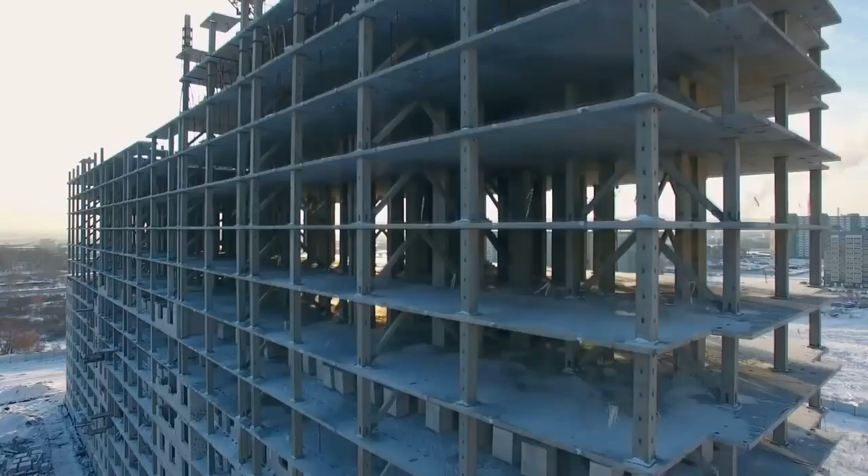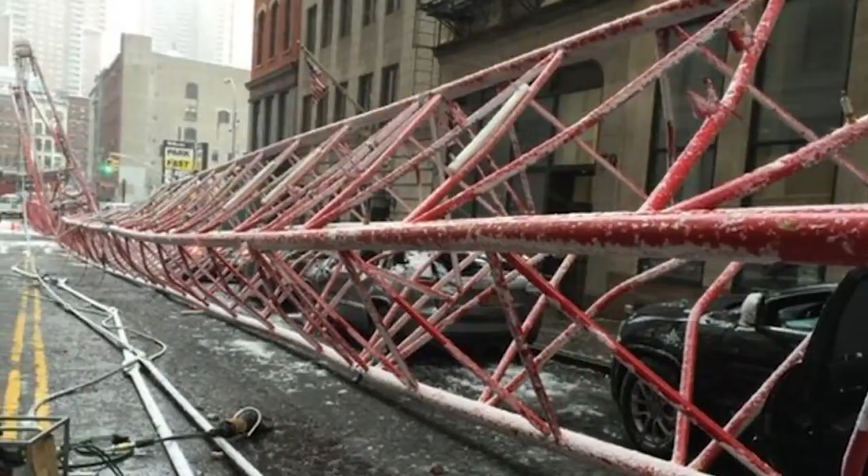While we may marvel at new building projects in our cities, what's not so marvelous is when they end up falling down. Bad planning, low-quality materials, and shoddy workmanship have led to everything from bridges to skyscrapers tumbling down. Today, we're taking a look at 15 epic construction fails.

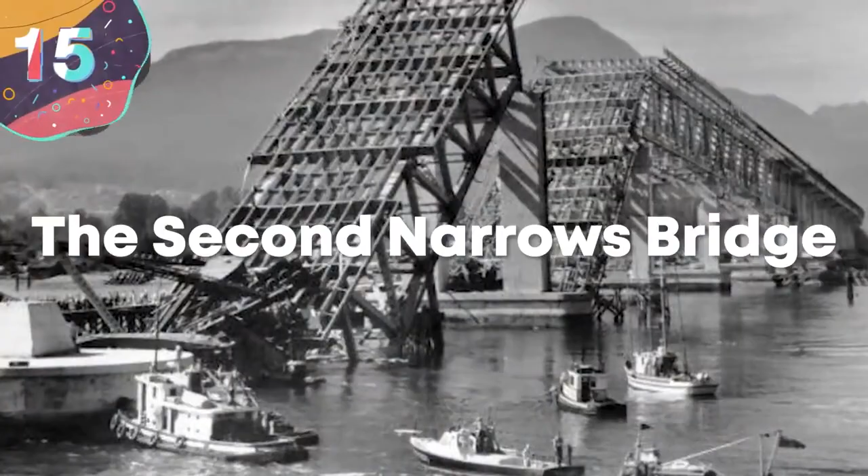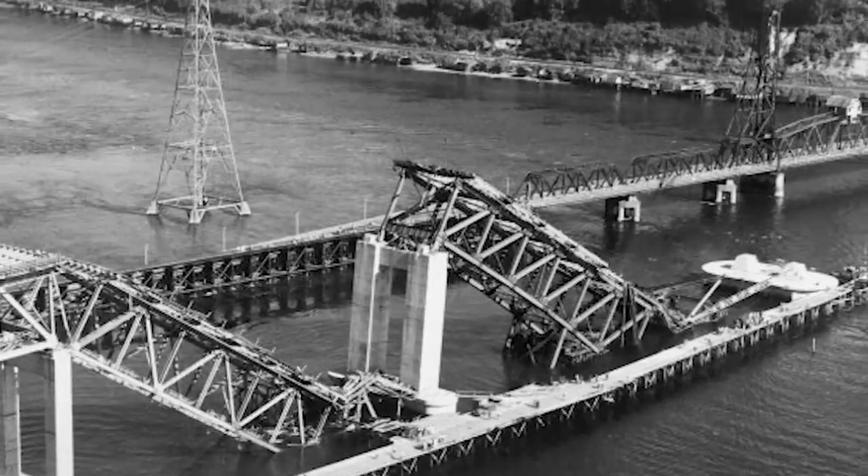Number 15: The Second Narrows Bridge. It is rare for there to be just one factor that leads to the failure of a construction project, and this was certainly the case with the Second Narrows Bridge. On June 17th of 1958, a number of structural issues worked against the bridge at once, causing it to crash into the Burrard Inlet below. The accident began with a crane being used to join two sections of the bridge malfunctioning, causing numerous parts of the bridge to collapse.

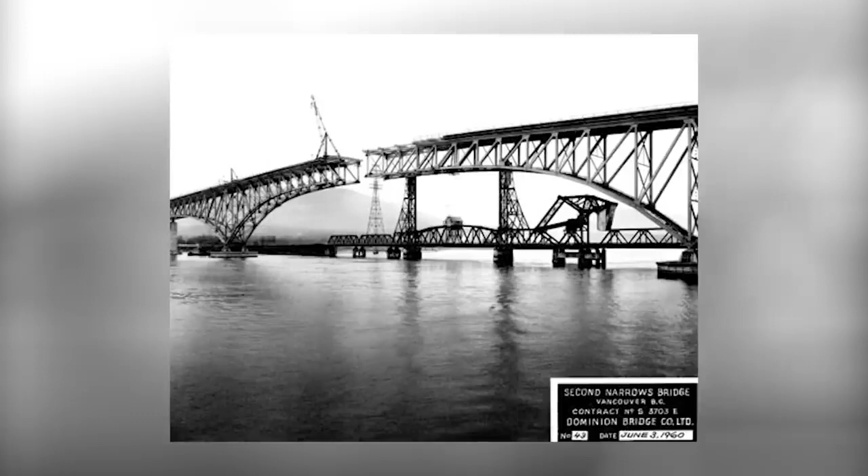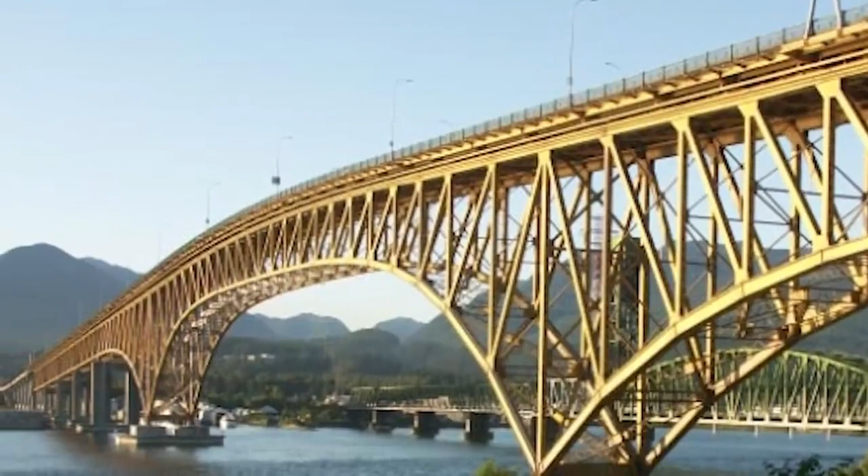After an inspection was done, it turned out that the cause of the bridge's collapse was multifaceted, due not only to the poor quality of materials used and shoddy engineering practices of those involved, but also because the temporary arm holding the fifth anchor span was too light to bear its weight. As a result, 18 workers lost their lives, and the bridge was later renamed the Iron Workers Memorial Second Narrows Crossing in 1994 to honor their memory.

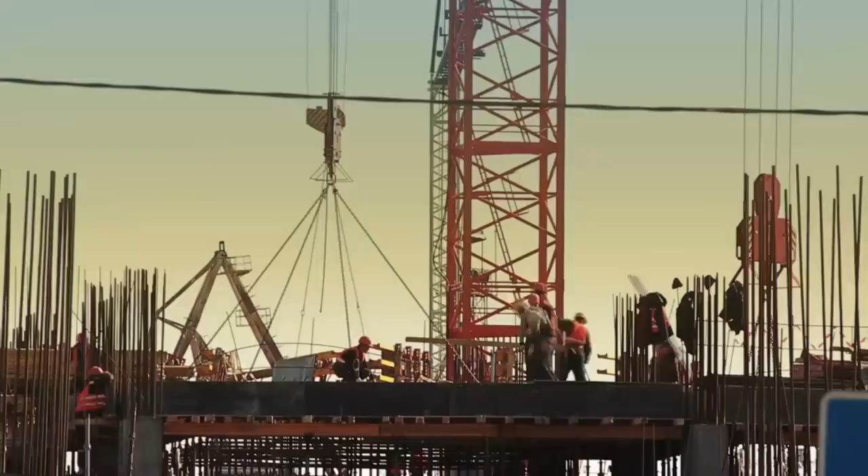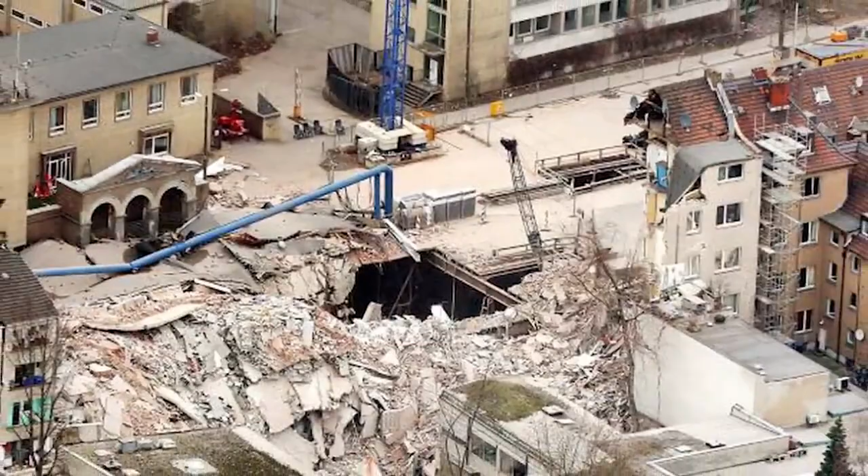Number 14: The Cologne City Archive Collapse. When building structures in a city, construction workers have to be especially careful, as oftentimes their actions can have negative consequences on the buildings standing around them. And while they're usually pretty careful, in 2009, the building of a metro line beneath the city of Cologne, Germany, caused the entirety of the Cologne City Archives building to collapse, leading to 2 deaths and damages of more than €1 billion.

Upon further inspection, it turned out that one of the underground diaphragm walls of the subway station had caused so much water, sand, and gravel to flow beneath the archive building that it eventually caused its foundations to crumble and wash away. As such, thousands of precious documents were lost, making it one of the worst cases of construction-related negligence in the city's history.

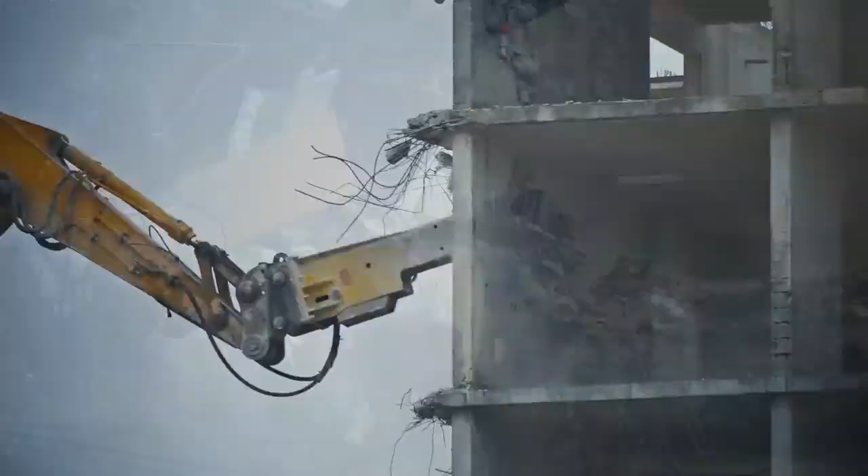Number 13: The Boston Scaffold Failure. While most construction mistakes become apparent during or after an accident, what many are not aware of is that major errors can occur while a construction site is being taken down. Such was the case at Boston's Emerson College in April of 2006.

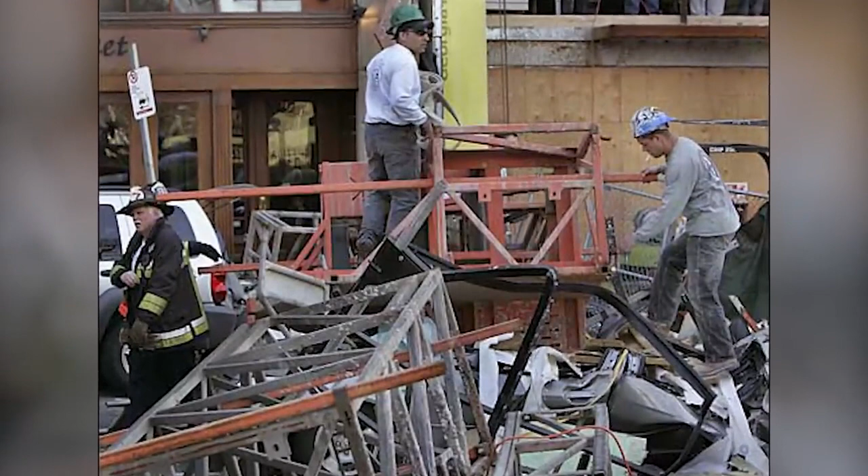While workers were taking down the scaffolding they had placed on a dormitory, they chose to disconnect the final metal tie securing a 3-ton platform to the side of the building without first attaching the scaffold to a crane. This resulted in the scaffold platform precariously dangling on a mast located 30 meters in the air, and because it had a weatherproofing tarp on it, the wind caught it and made it crash into the street below. This ultimately led to 3 people being crushed by the platform, making it one of the worst construction takedown attempts to date.

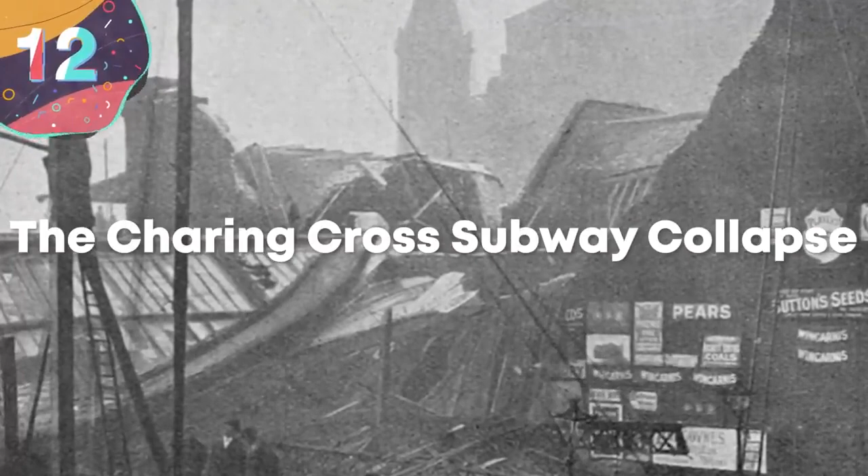Number 12: The Charing Cross Subway Collapse. Typically speaking, building maintenance is meant to make a structure in tip-top shape, yet at times it can do the exact opposite, and such was the case in the Charing Cross Subway collapse.

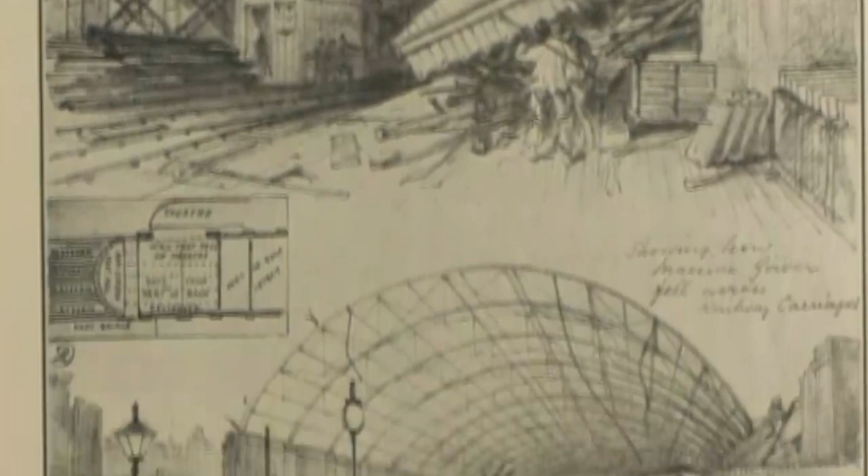Occurring on December 5th of 1905, the incident happened thanks to a 20-meter-long steel beam collapsing onto the platform below, ultimately causing most of the iron and glass roof to collapse. This led to many of the wooden boxcars of the subway train being smashed, with a total of 6 people passing away and 27 becoming injured in the disaster.

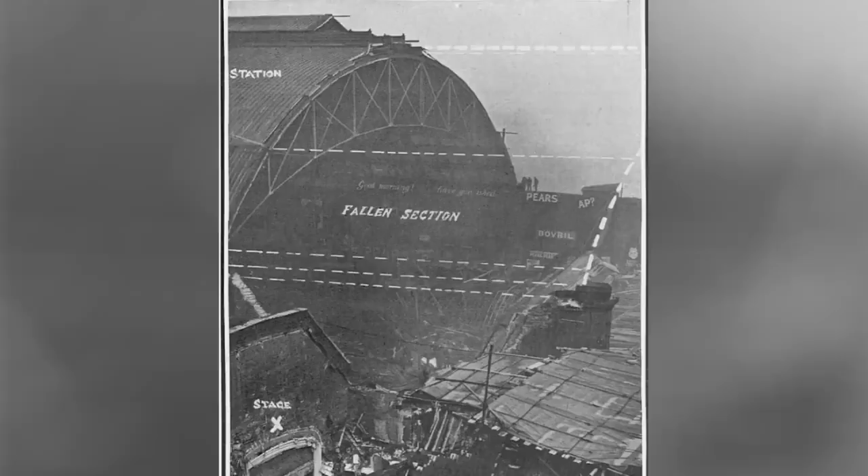Upon inspection, it turned out that the weight of the construction materials had caused the scaffolding to collapse, leading to a chain reaction that caused the entire station roof to fall. Had the workers been a little more careful, the disaster likely could have been avoided altogether.

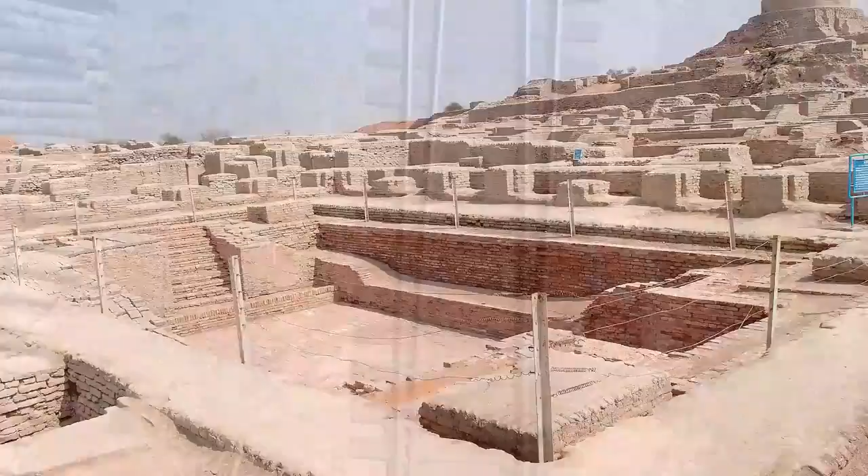Number 11: The Lahore-Multan Railway. Generally speaking, construction projects tend to build things up, but in the case of the Lahore-Multan Railway, it effectively tore things down. That's because Harappa, the archaeological site in Punjab, Pakistan, was severely damaged in order to provide material for the railway. Harappa is the site of an ancient city that existed between 2600 and 1900 BC, and is extremely valuable to archaeologists.

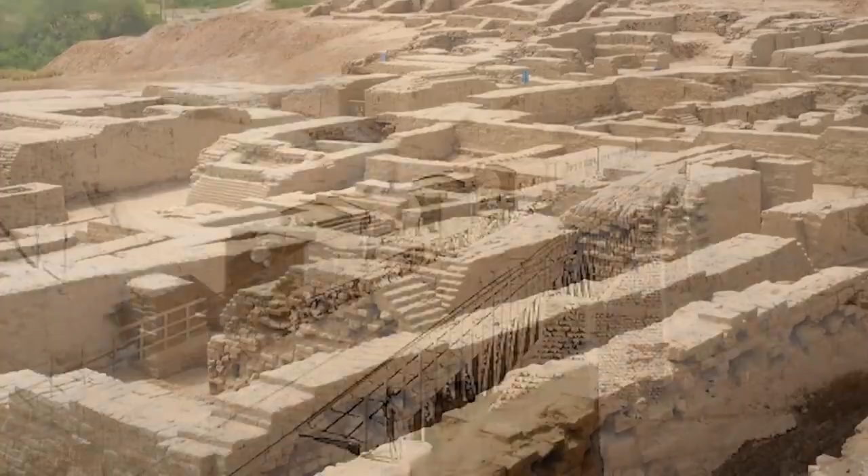However, when the British came and built the Lahore-Multan Railway, they got to work dismantling it, using many of the bricks from the ruins to make the track ballast. As a result, while Harappa is still an interesting place to visit today, the ancient city is much less intact than it was just a few hundred years ago.

Number 10: Lotus Riverside. When building an apartment, location is everything. After all, not only is it important to place it where the housing demand is high, but it's also crucial to ensure that the ground level below it is sturdy.

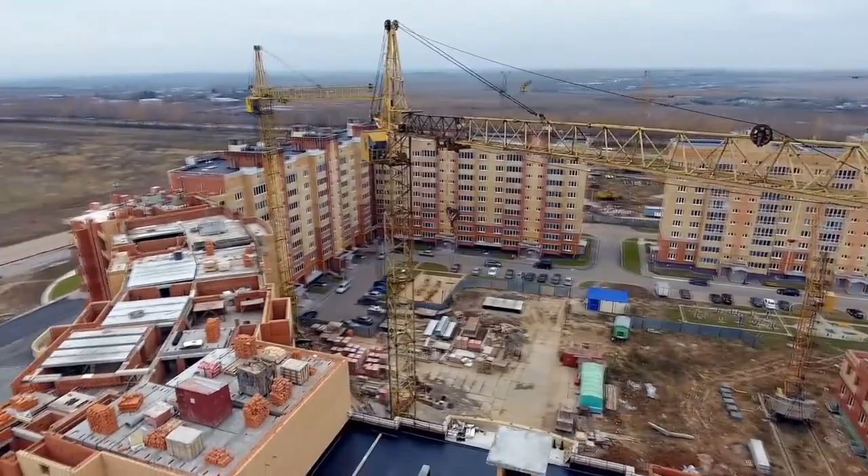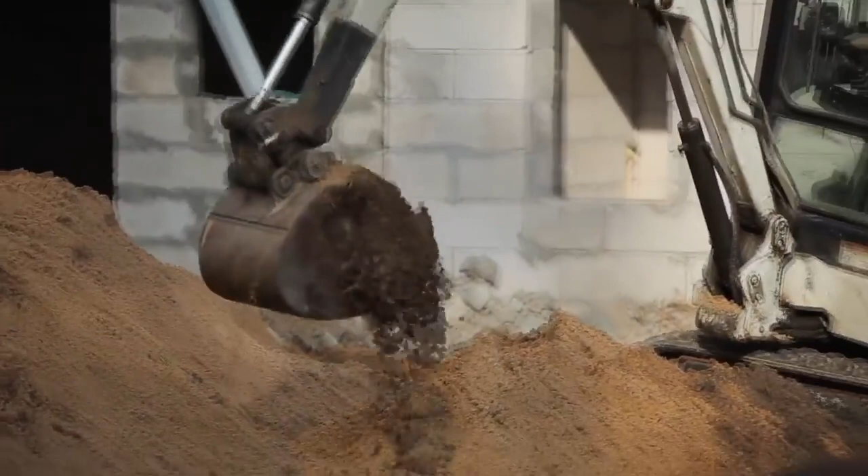However, the planners of Block 7 in the Lotus Riverside apartment complex in Shanghai, China, obviously never got this memo. While construction faced no major problems at first, issues began to arise when the builders decided to dig out a 4.5-meter deep underground parking garage for the complex.

This created a large pile of dirt. Yet rather than move it to a secure location, it was brought to a landfill beside a nearby creek. The weight of this dirt then caused the riverbank of the creek to collapse, and as a result, water began to seep into the ground beneath Block 7.

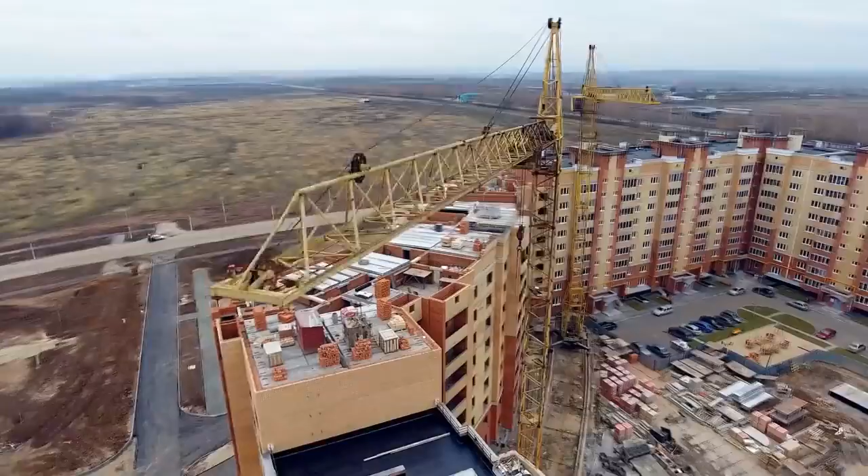This made the dirt surrounding the apartment very wet, and this should have caused the company to pause construction. Yet they continued on, and as a result, the muddy ground was not stable enough to hold the apartment block's weight in place. On June 27th of 2009, the entire building came tumbling down, trapping and killing one unfortunate worker who was left inside.

Number 9. The New York crane disaster.

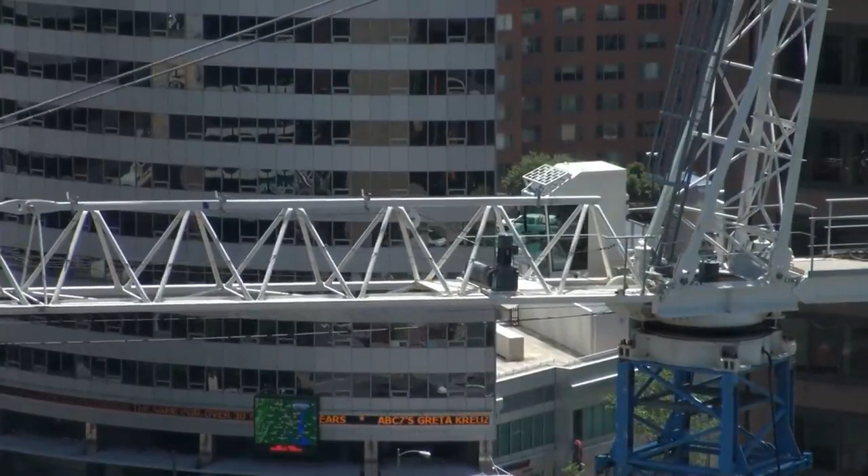While cranes may be pretty scary to operate, what's even more scary is when they malfunction and crash into the street below. Yet that's exactly what happened when, on March 15th of 2008, a crane measuring about 76 meters high collapsed. At the time of the accident, the construction workers were busy tying lateral beams to both the crane and the 18th floor in order to give it more structural support.

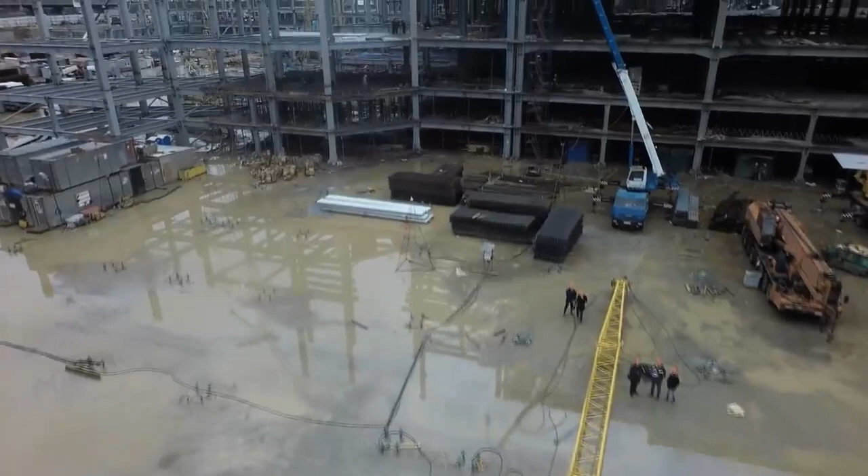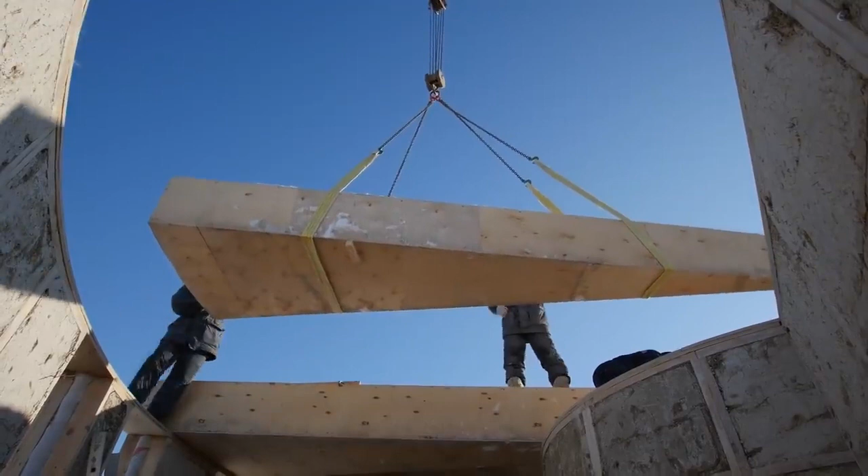This time around, they did so without the use of a mobile crane, which was something they had never done before. This was compounded by the fact that the slings they used were not only made of polyester, a very weak material for this purpose, but also not protected against sharp edges.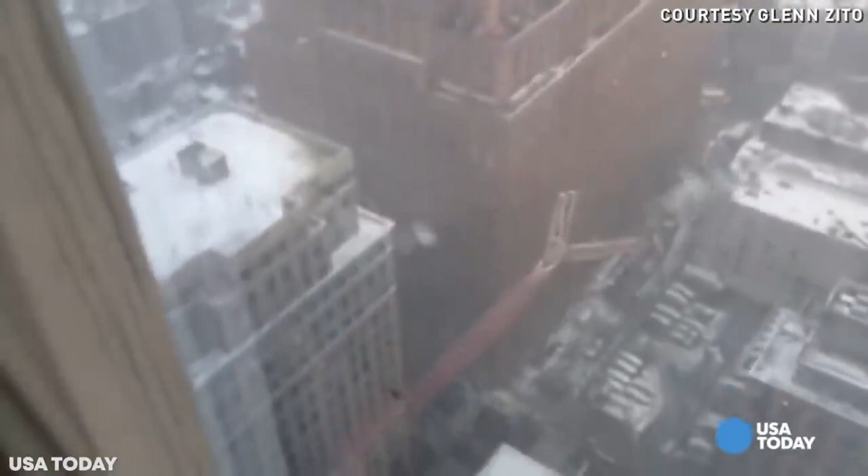It was these factors that caused the crane to ultimately collapse and led to the passing of a total of 7 people. Yet what's perhaps most surprising is that William Rapetti, the crane rigger in charge of stabilizing the crane, was never convicted of any charges.

He was charged with 14 counts of manslaughter, and due to him admitting he had not inspected the slings used in attaching the crane, many thought he would surely be found guilty due to his negligence. However, this did not end up being the case, as he was eventually cleared of all charges.

Number 8. The Greater Noida building collapse.

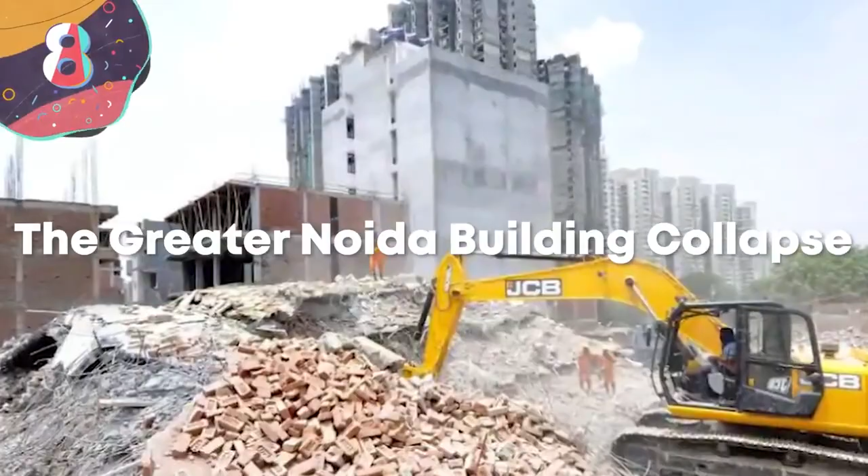While cutting corners can often cause problems in the construction of a new building, few contractors have been quite as cheap as those who built the Greater Noida apartment building in India. Despite being set to be a large apartment building, the decision was made to use woefully insufficient materials in order to create the structure.

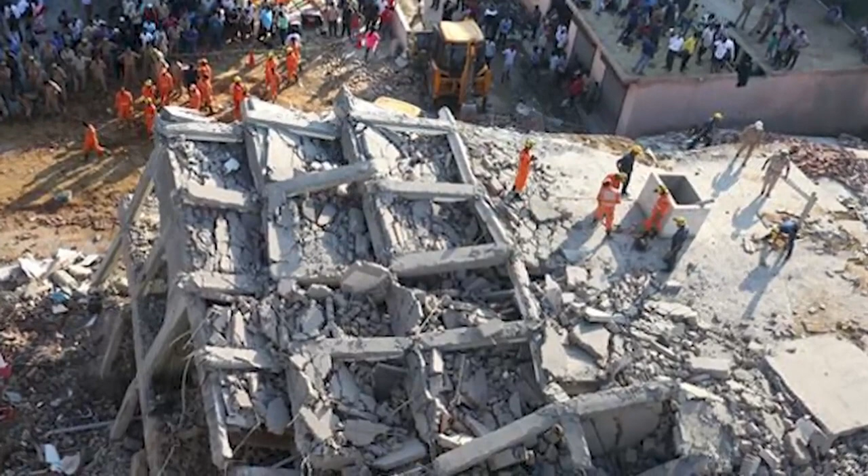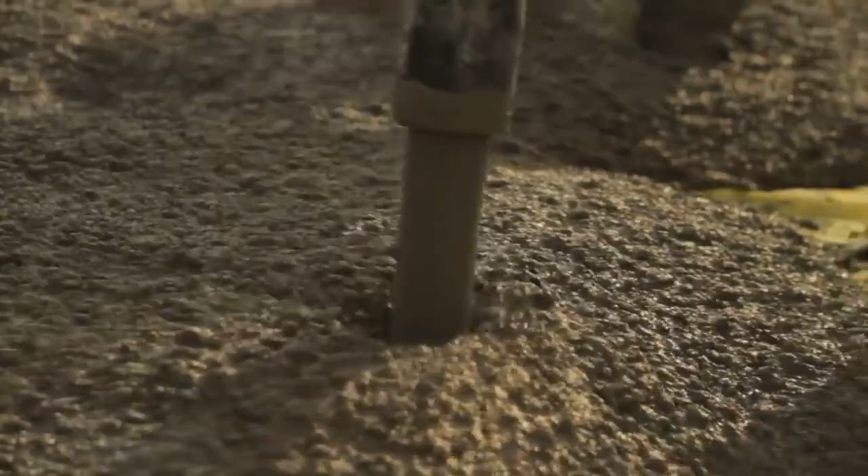It was found that the ratio of cement to sand while preparing construction material was not 1:5 as is normal for a building of this size, but as much as 1:20. The iron beams used to support the structure were not the recommended thickness of 22 to 25 millimeters, but instead just 10 to 12 millimeters.

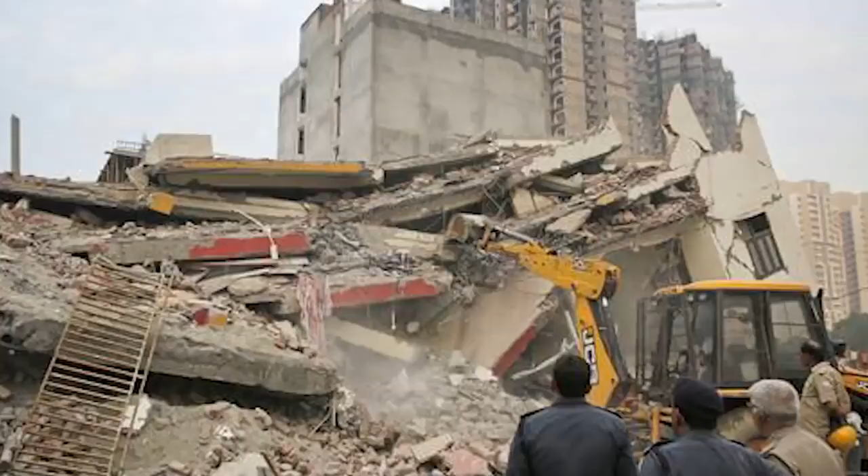When compounded with the fact that water had accumulated in the basement of the building and had made the base much weaker, it shouldn't come as a surprise that it was only a matter of time before it came crashing down. With a total of at least 9 people dying in the collapse, it was easily one of the worst construction disasters that the region has ever experienced.

Number 7. The Malpasset Dam.

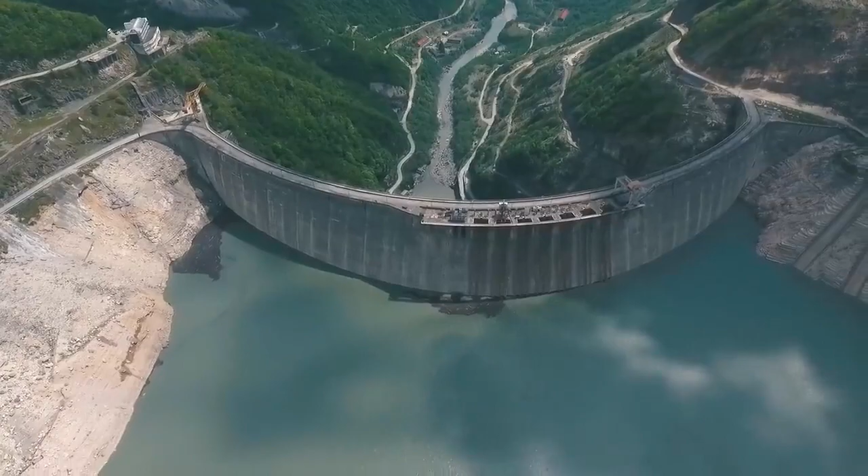When it comes to creating a dam, location is critical, as the massive amounts of water and concrete involved can cause major issues if placed in an unideal spot. While geological surveys usually ensure that these types of mistakes are minimal, the designers of the Malpasset Dam learned this the hard way, when on December 2nd of 1959, the entire structure collapsed, leading to a massive flood that took the lives of 423 people.

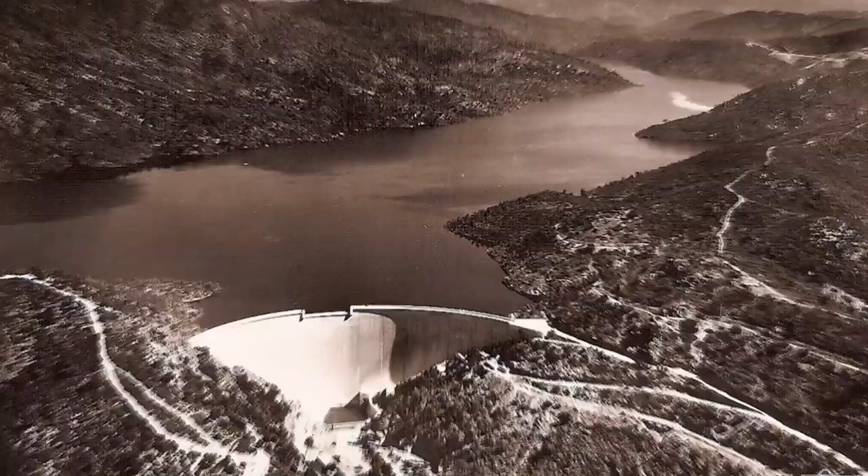The dam, located on the Reyran River in the French Riviera, was built back in 1954, and at that time the area was deemed suitable for its construction. However, what the builders failed to realize was that the area was located near a tectonic fault, and thus when they began to use explosives to aid in the construction, they severely damaged the already unstable rock.

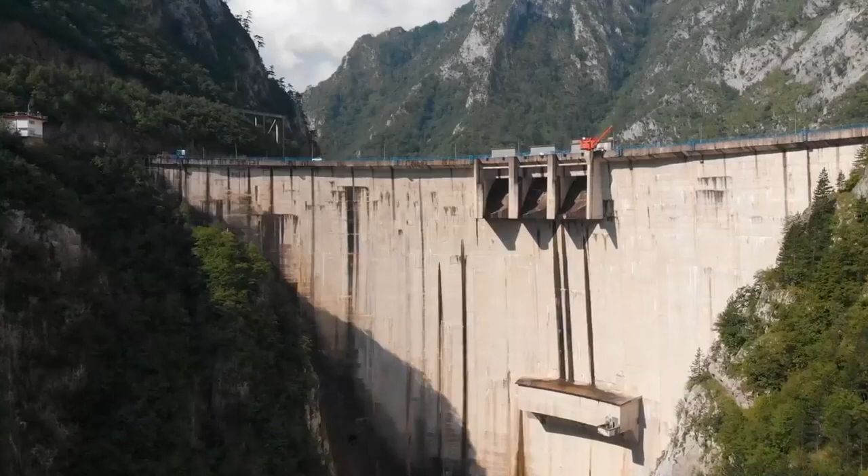To make matters worse, they built on top of a nearly impermeable rock known as gneiss, and this was problematic because it caused the diagonally flowing water to become trapped underneath the dam, further adding to its instability. Cracks began to form years before the collapse, but due to the government neglecting to do anything about it, the dam remained standing until its disastrous end.

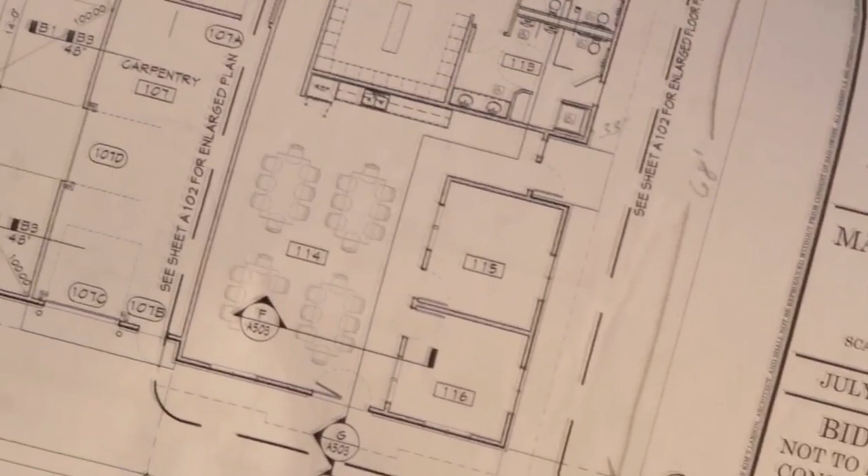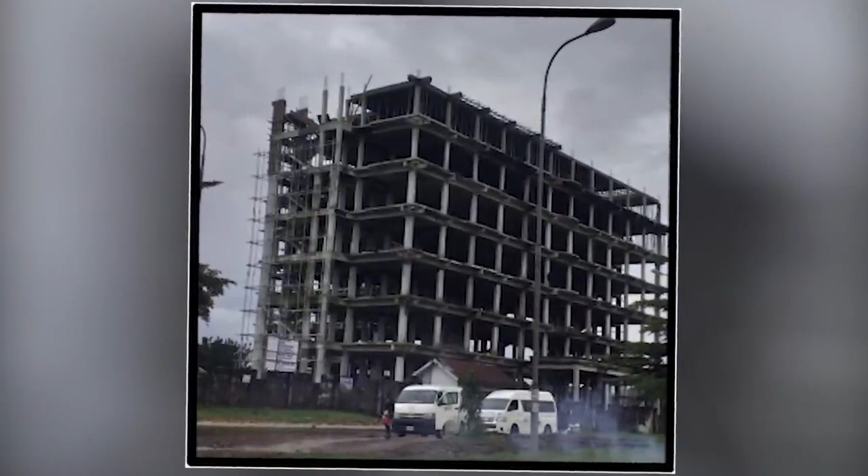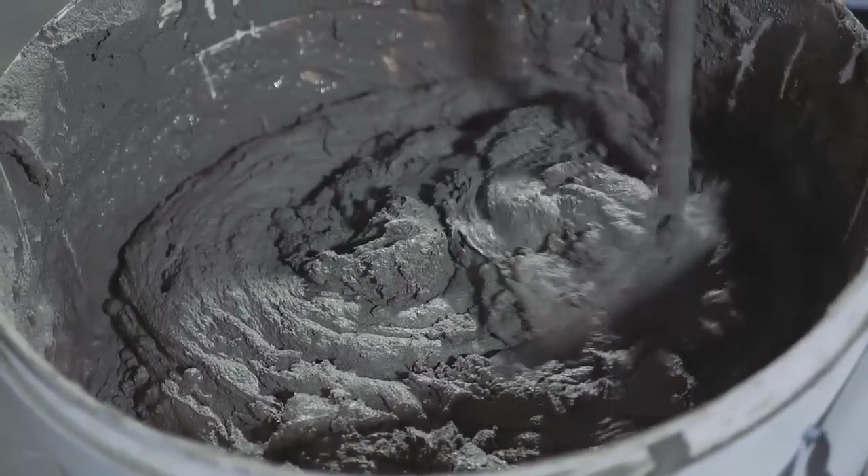In January of 2011, a hotel that was supposed to be many stories high ultimately collapsed due to a number of shoddy construction practices. In particular, it seems that the cement used was very poor, with the mix not being evenly distributed throughout the building. This was compounded by the fact that the steel reinforcement bars were too thin, making them too weak to hold up the weight of the materials being used.

Yet perhaps worst of all, the planners of the building had never gone to architectural school, thus leading to the building's poor design. Had regulations been properly followed, this entire disaster could have been avoided. However, because they were not, the entire building was destroyed.

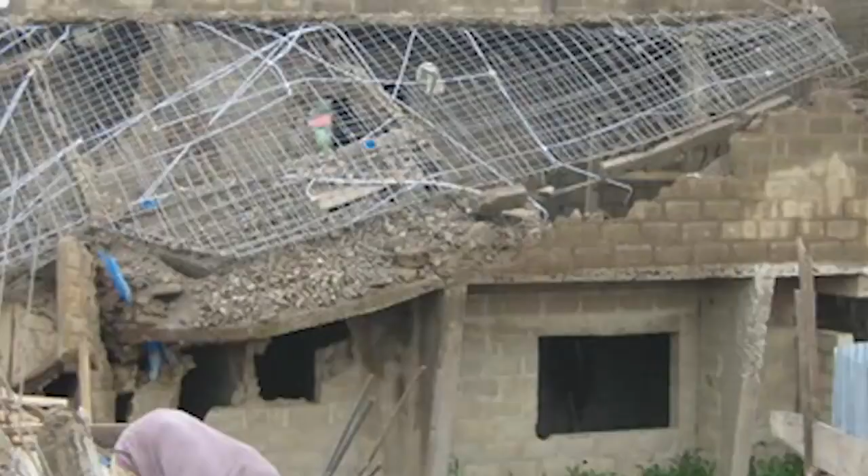Number 5. The Quebec Bridge. Generally speaking, people learn from their mistakes, yet the Quebec Bridge was a clear example of how this sometimes isn't the case.

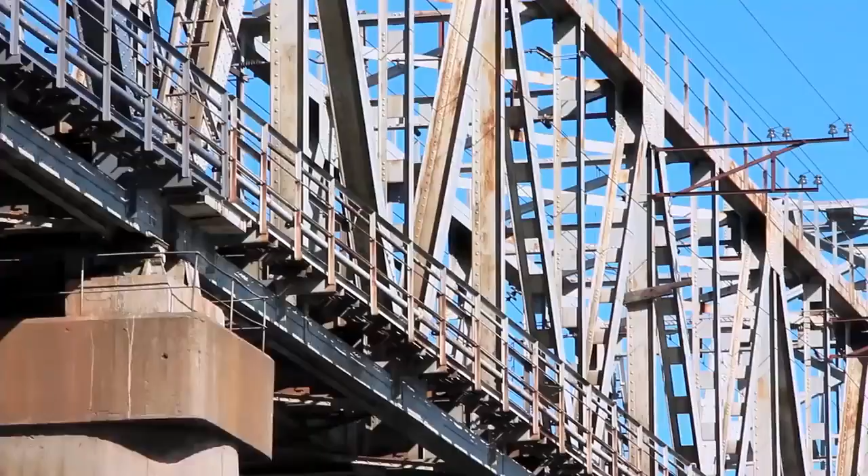This was because the Quebec Bridge is infamous for not only collapsing once, but twice, due to faulty design and construction techniques. Preliminary work on the bridge first began in 1887, when plans were made to connect Quebec City with the town of Levis using a structure that ran over the St. Lawrence River. Yet by 1907, it was clear that the calculations made in the planning stages were never properly checked, as the bridge was in fact too heavy to support its own weight.

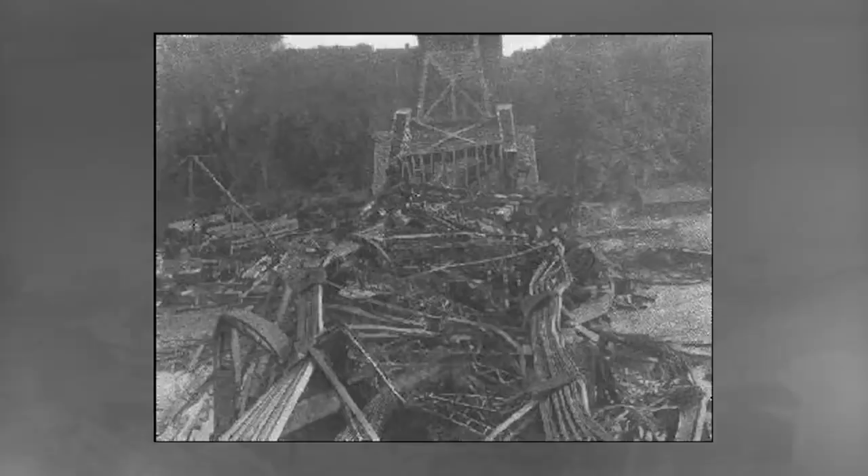While the engineering team on site could see that the bridge had some serious distortions, they were unfortunately still in the process of approving a pause in construction when disaster struck. On August 29th of 1907, the entire south arm and part of the central section of the bridge collapsed, killing 75 workers and injuring 11 others.

After this incident, a commission was made to investigate the accident, although all of those who were deemed guilty of causing the disaster through their faulty calculations were ultimately let off the hook. As such, construction of a new bridge under a new set of engineers began.

Yet on September 11th of 1916, the hoisting devices used to lift up the central part of the bridge broke, causing the central part of the bridge to fall into the water, which led to the death of a further 13 workers. Once again, no one was charged with any sort of misconduct.

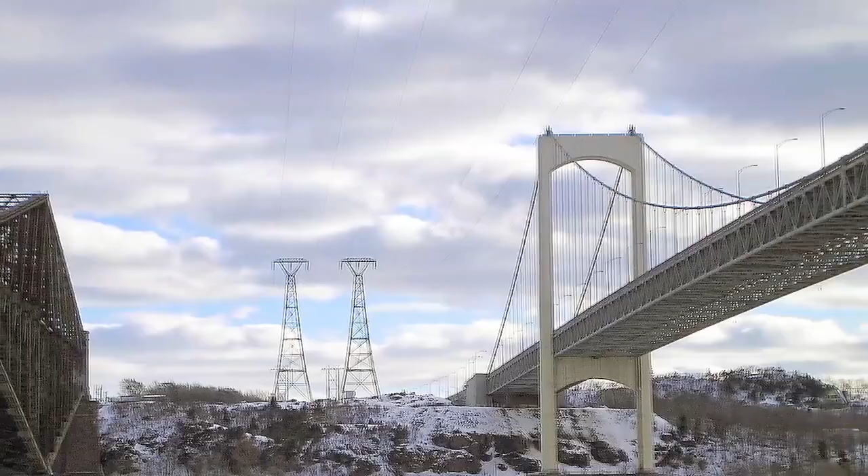Thankfully, despite the bridge having already collapsed twice, it seems like the third time was a charm. That's because in spite of further concerns, construction resumed almost immediately after the second accident. And after a lot more resources were poured into the project, the Quebec Bridge was finally completed in August of 1917.

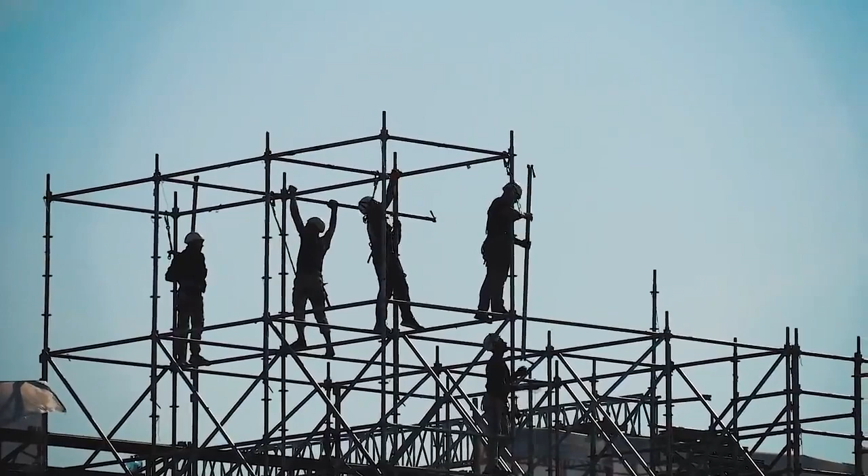Number 4. The Willow Island Disaster. While the United States has been the home of many construction disasters, the Willow Island disaster is thought to be one of the worst of them all.

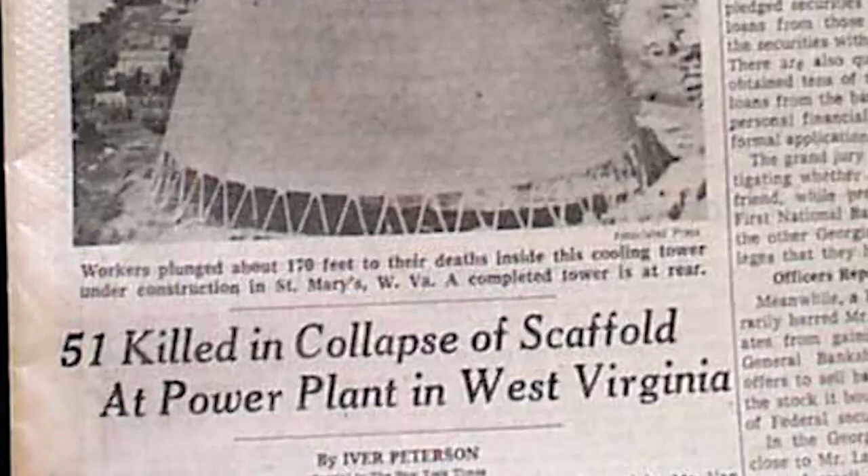Occurring on April 27th of 1978, it involved the collapse of a cooling tower under construction at the Pleasants Power Station on Willow Island, West Virginia. At the time of the accident, one of its towers had reached a height of 51 meters when a cable hoisting a bucket of concrete went slack.

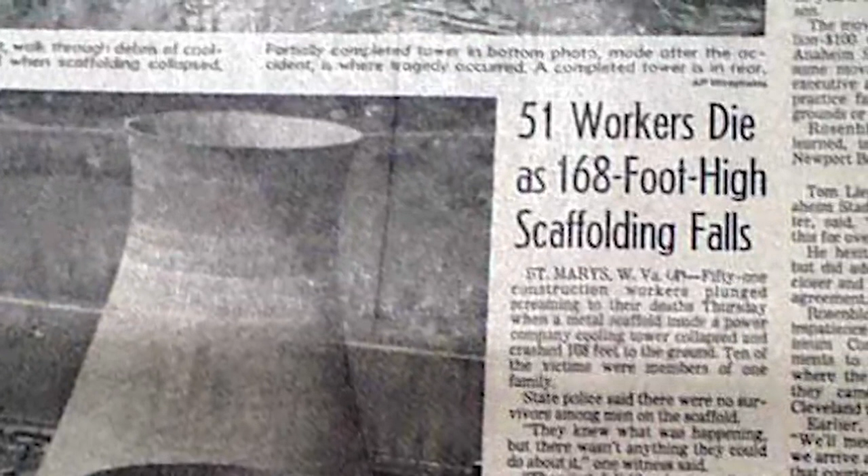This caused the crane that was pulling it up to fall into the tower, leading to the previous day's concrete beginning to unravel. This began a cycle where concrete peeled off from the tower at a rapid rate, and it wasn't long until a jumble of concrete, wooden forms, and metal scaffolding fell into the hollow center of the tower. This ultimately led to the deaths of 51 construction workers that were working on the tower.

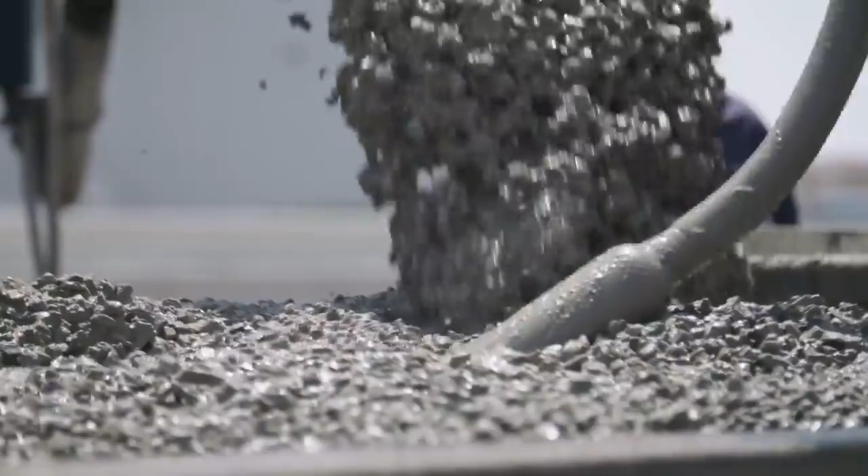An inquiry into the accident was soon held, and it appeared there were 3 primary causes. The first was that the crane itself had been modified without undergoing proper review, leading to it collapsing when it began to lift weight. This was compounded by the fact that, in order to save time and money, workers poured concrete into the tower mold every single day, which was problematic because concrete takes more than 1 day to set. As a result, the concrete was not strong enough to resist the weight of the crane once it was hit.

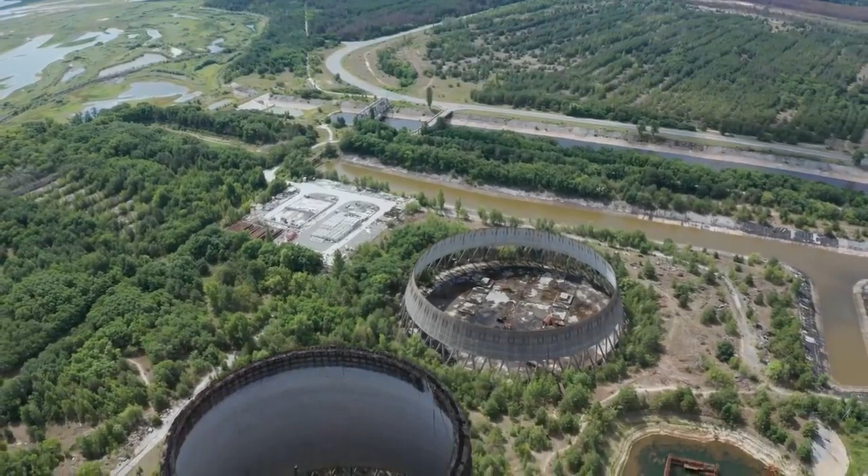To top this off, there was only one access ladder on site, making it near impossible for the workers to escape once it was clear there was a problem. The end result of all this negligence was that the victims' families were compensated with about $1,700 each, or about $6,700 in 2020 money, by the contracting firm, with the firm itself not having any criminal charges laid against it.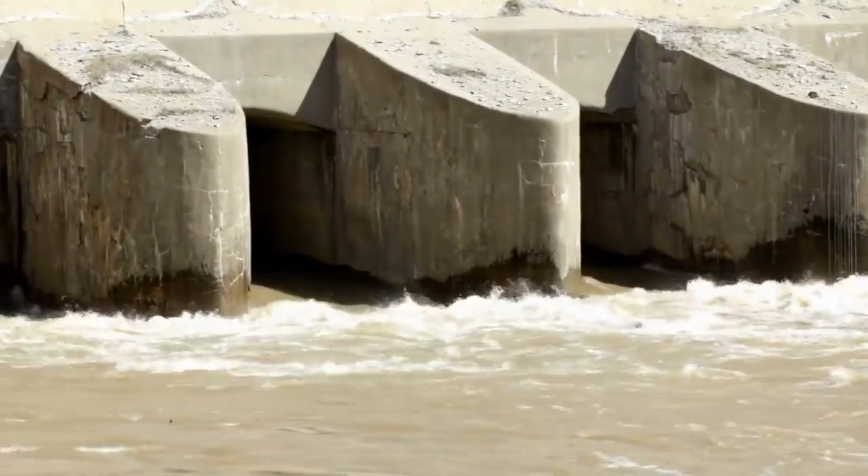Number 3. The Gleno Dam. Dams tend to be pretty expensive construction projects, as the designs and materials used to build them have to be top-notch in order to avoid disaster.

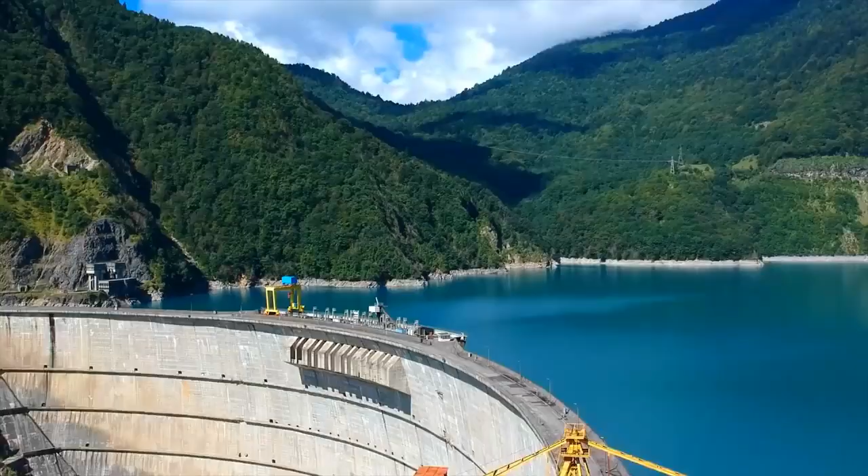Yet it seems that the builders of the Gleno Dam never got the memo, as just 40 days after its construction, the entire structure collapsed, leading to the deaths of at least 356 people from nearby villages due to the ensuing flood. Upon investigation, it was clear that the collapse of the dam could be blamed almost exclusively on the negligence of the construction workers and designers.

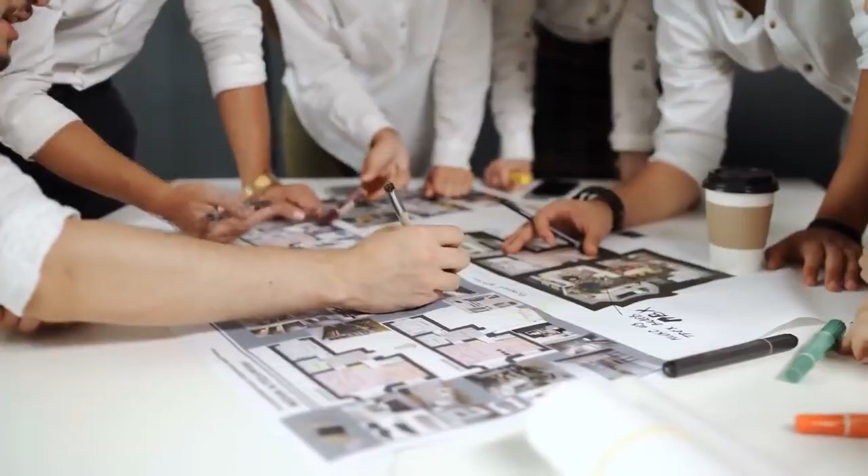Perhaps the most glaring error was the fact that they had used substandard cement mortar, which was made worse by the fact that it never properly set before the reservoir was filled, thus causing it to become wet and damaged. They also made the poor choice to reinforce the cement not with new materials, but with anti-grenade netting that had been left over from World War I, which was by all accounts unsuitable for the job.

Yet perhaps the most disastrous error of them all was that the dam's design was completely changed halfway through construction. That's because while the Gleno Dam was originally meant to be a gravity dam, a lack of funding meant that after the gravity dam foundations were built, the plans were changed so that it instead became a multiple arch dam. This caused the two sections of the dam to be poorly joined together, and due to the already inferior design of the multiple arch dam, this just made the whole project a lot worse.

As such, its collapse could have easily been avoided had no corners been cut. Yet due to the fact that any workers who complained about the dam's deficiencies were fired, all the warning signs were simply ignored.

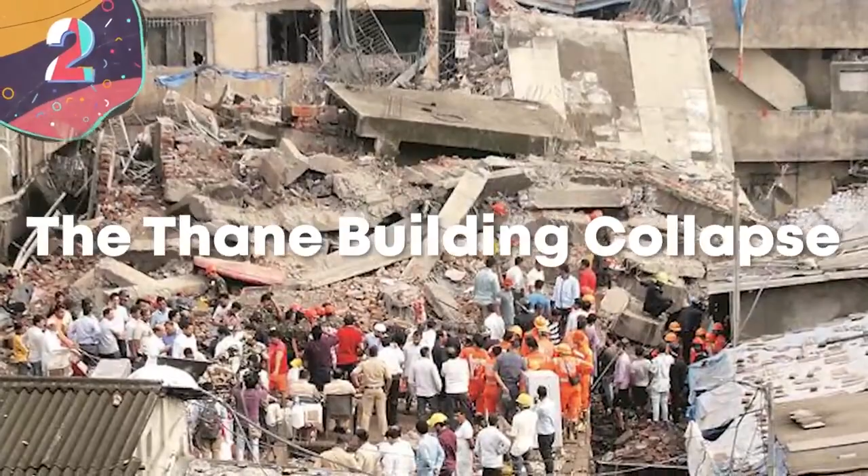Number 2, the Thane building collapse. While most of the buildings on this list had full approval from the government before construction began, the Thane building collapse in Thane, India stands apart for being a completely illegal structure.

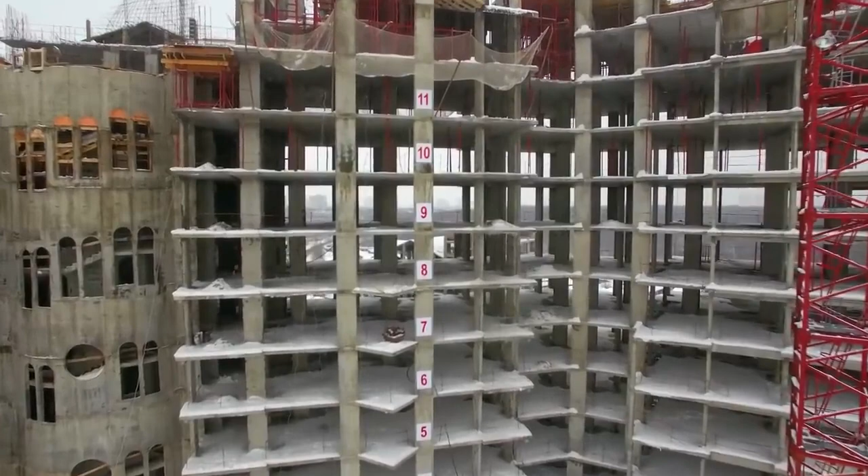That's because despite the plan for it to be a relatively large apartment building, the planners never submitted a blueprint to the government office, and as such didn't have the occupancy permit for the 100 to 150 residents living inside the building. This was especially problematic because the architect involved had actually never gone to architecture school, and thus was completely unqualified to design the structure.

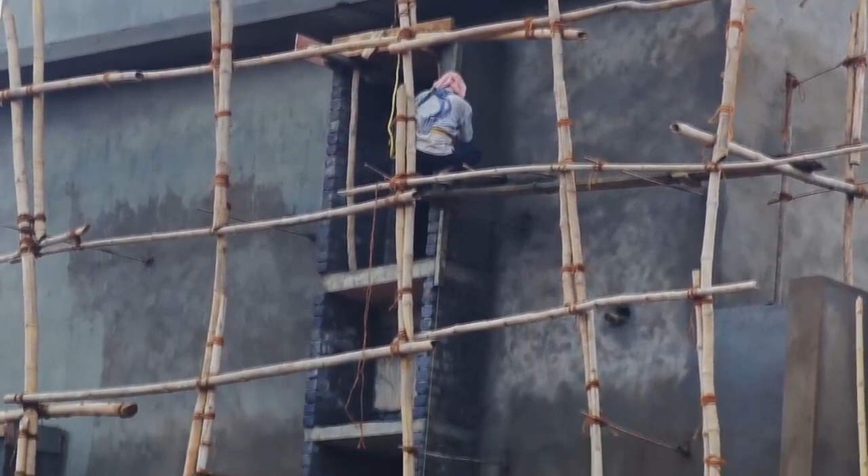When this is then added to the fact that the building had followed virtually no safety protocols and had used poor quality materials, it becomes clear that the collapse, which occurred on April 4th of 2013 and resulted in the deaths of 74 people, could have easily been avoided.

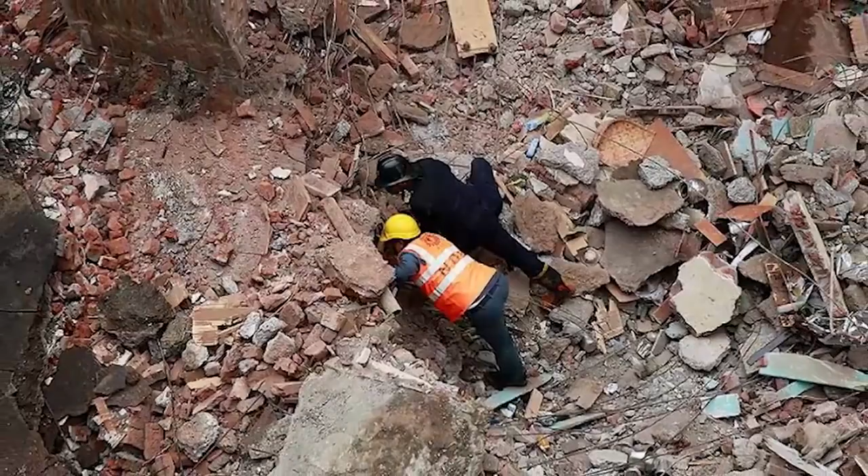Yet what's interesting about this case is that it's not one of a kind in the area. That's because shoddy construction and illegal buildings are the norm in the city of Thane, thanks to the fact that there's a severe lack of housing to meet the ever-growing demand. As a result, it's estimated that there are about 500,000 illegal buildings within the Thane district, with many of these not being built to a very high standard.

Therefore, the fact of the matter is that until this illegal housing problem is dealt with, we will likely see accidents similar to this one continue to occur.

Number 1, the Hawk's Nest Tunnel. Although most of the projects on this list collapsed or malfunctioned either during or after construction, the Hawk's Nest Tunnel is an exception to this rule. After all, the tunnel, which is located near Gauley Bridge, West Virginia, was built as part of a successful hydroelectric project, and as such it is still in use today.

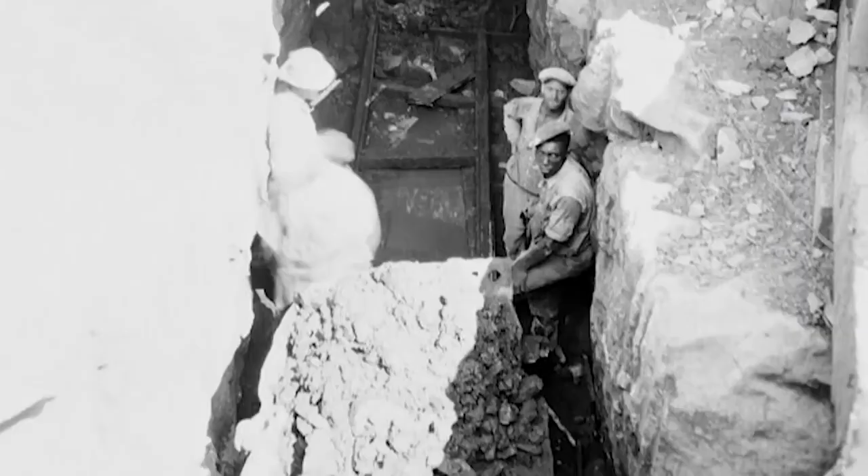However, what's not so successful was the choice of location for this tunnel. You see, during its construction, workers found the mineral silica, which is known to cause severe lung problems in those who breathe it in. Yet in spite of this, they were asked to mine it so it could be sold for use in steel processing.

And since the year was 1930 and the U.S. was in the grips of the Great Depression, the workers, who primarily consisted of poor African-American laborers from the South, could not refuse. As such, they continuously worked 10 to 15-hour shifts where they would use drills and dynamite to mine the silica-contaminated sandstone, with these workers not being given any masks or breathing equipment to use while mining.

Thus, when the work was done, many workers developed silicosis, which is a debilitating lung disease caused by the effects of silica dust in the lungs. This caused as many as 1,000 of the 3,000 workers to die as a direct result, with the totals perhaps being even higher. Thus, this project, while successful, is largely considered to be one of the largest construction disasters in American history, and ultimately led to new legislation being passed in order to ensure that such an incident would never occur again.